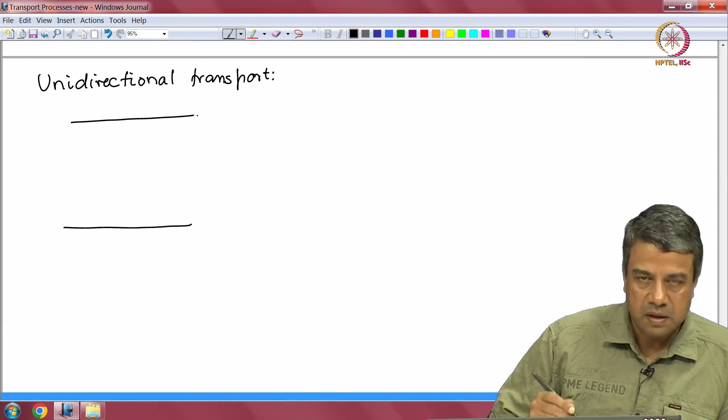Consider a domain. I will consider z as the direction across. Z is the direction in which there is variation. So, you could for example have the concentration field varying in some way between these two. Now, how do we derive an equation for the concentration? So, we will take a differential volume.

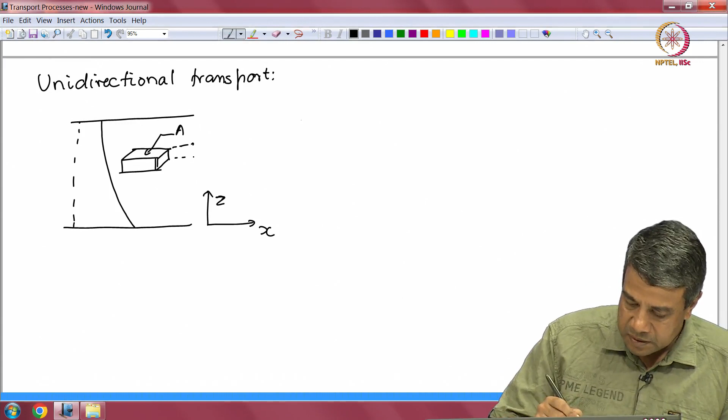Of area A perpendicular to the z direction and thickness delta z. Area A perpendicular to the z coordinate and thickness delta z, and we will write a balance condition for that. So, this is the location z, this is the location z plus delta z, and the difference between these two is delta z.

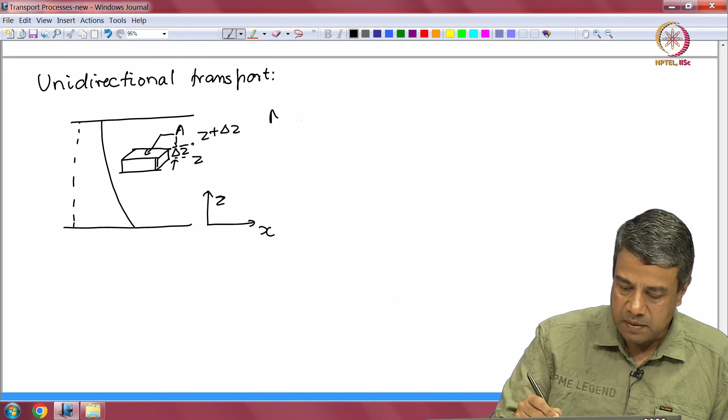The total mass in the differential volume is the concentration times the volume itself. Mass is equal to C of z, t times delta z times A. That is the total mass in the differential volume.

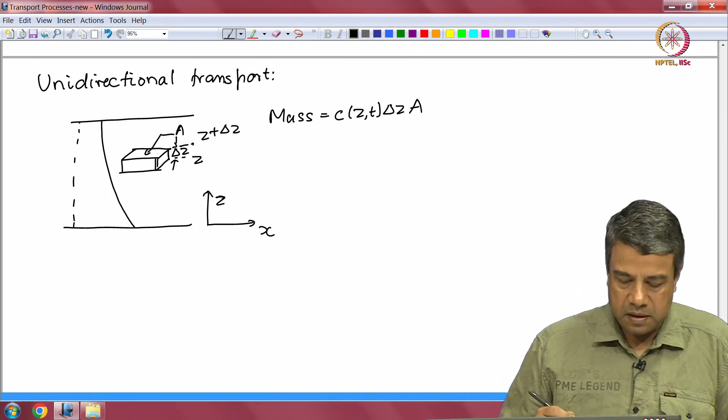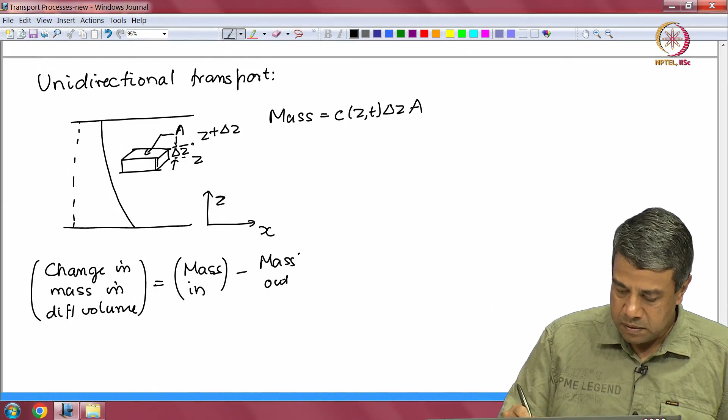What is the balance condition? The mass conservation condition is that change in mass in differential volume is equal to mass in minus mass out, plus production.

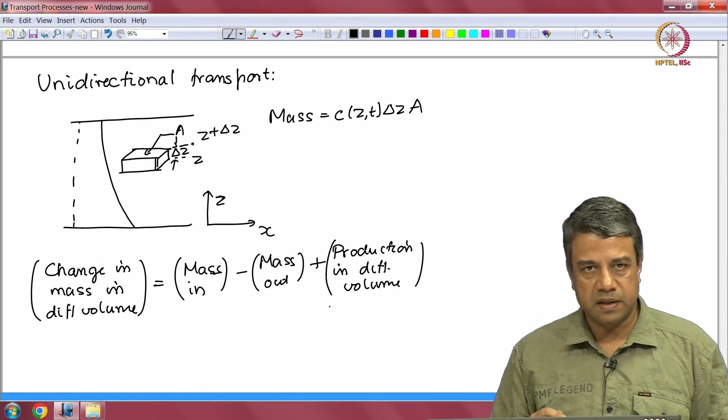Of mass in the differential volume, the source of mass. So, that is the conservation condition. What is the change in mass in a time delta t, for example?

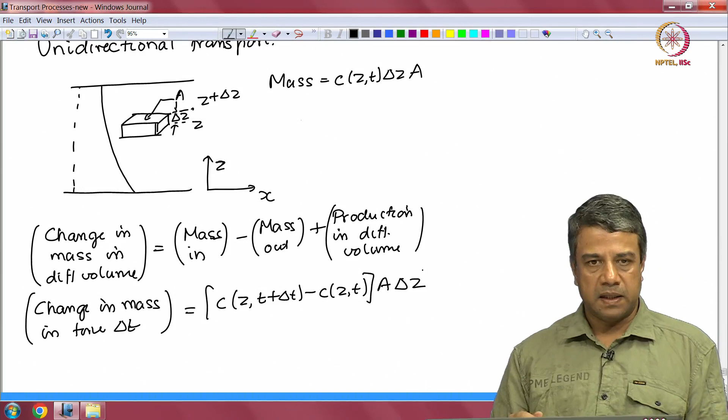In time delta t in this differential volume, the change in mass within this differential volume is going to be equal to the concentration at z, t plus delta t minus the concentration at z, t, the change in concentration, times the volume, which is A delta z. That is the change in mass in a time delta t.

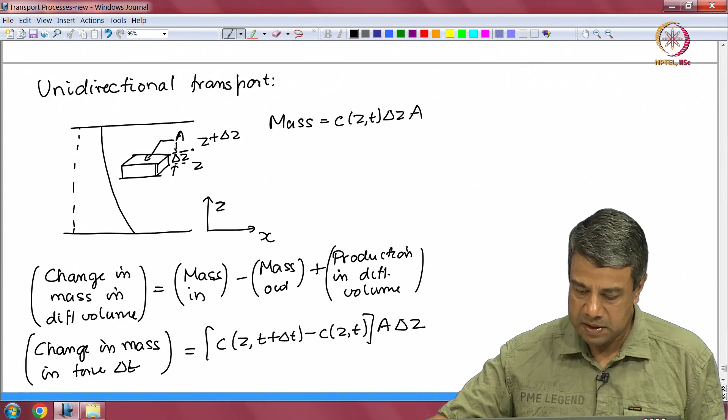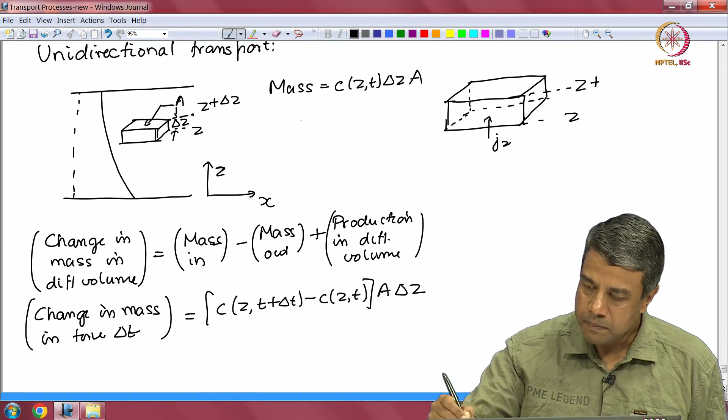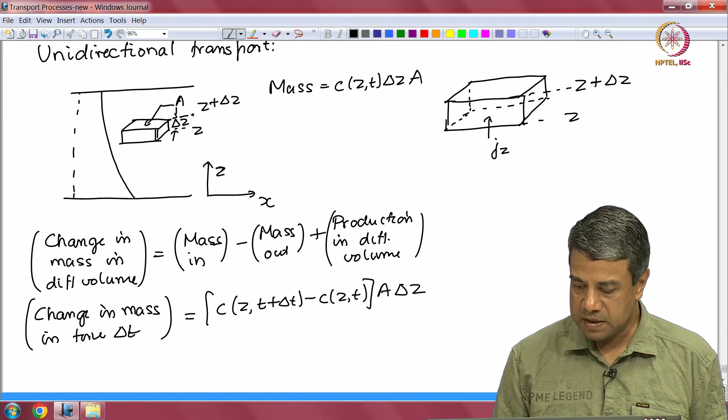What is the mass in? So, if I just expand out that differential volume over here, there is a mass coming in because of the flux at the surface at z. Recall that I had said the flux is positive if it is in the plus z direction. Therefore, the mass in is because of the mass coming in at z.

So, mass in is equal to the flux at the location z times the surface area A times delta t. Note that the flux is mass transported per unit area per unit time. So, I have to multiply the flux by the area and by time in order to get the mass coming in.

Similarly, mass out: mass decreases in the volume because of the flux that is leaving at the location z plus delta z. Therefore, this is equal to J z at z plus delta z, A delta t. So, those are the components of the mass in and mass out at the surface.

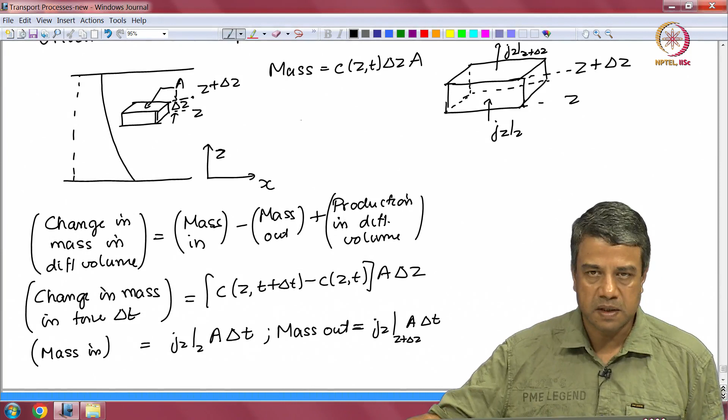I should note here that because there is a variation in the concentration only in the z direction, this is unidirectional transport. That means that the flux is also only in the z direction. So, that is the mass in and mass out, and finally, we have the production.

Recall that I told you that the production is defined per unit volume per unit time. So, this is going to be equal to the rate of production of mass at the location per unit volume per unit time multiplied by the volume multiplied by delta t. That is the rate of production within this differential volume, because I have defined S as the production per unit volume per unit time.

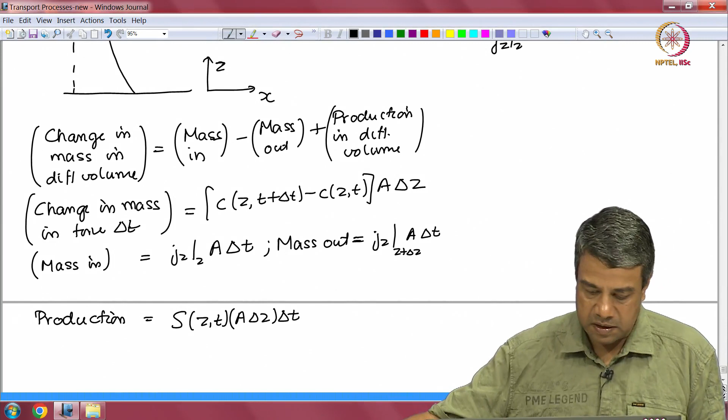So, these are the different terms in the equation. I put it all together. C at z, t plus delta t minus C at z, t, into A delta z, that is the change in mass in the differential volume, is equal to the mass in, which is J z at z A delta t, minus the mass out, which is J z at z plus delta z A delta t,

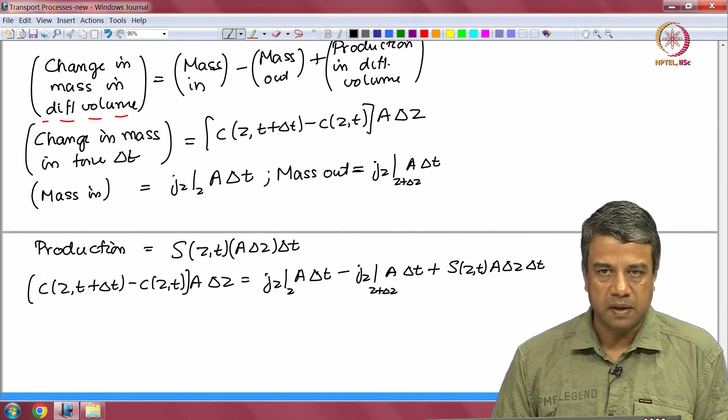plus S of z, t A delta z delta t. So, this is the balance equation for the differential volume A delta z over a time delta t. We divide throughout by volume and by time to get a difference equation.

If I divide by A delta z delta t, I will get C at z, t plus delta t, minus C at z, t, by delta t. This is equal to J z at z minus J z at z plus delta z, divided by delta z. A and delta t will cancel out, and then I will get a final plus S of z, t. So, this is the mass balance condition.

I have done a balance for the mass in a differential volume over a time delta t, the change in mass in the differential volume A delta z over the time delta t, divided by A delta z and divided by delta t. Now, I take the limit delta z goes to 0 and delta t goes to 0. I get partial C by partial t.

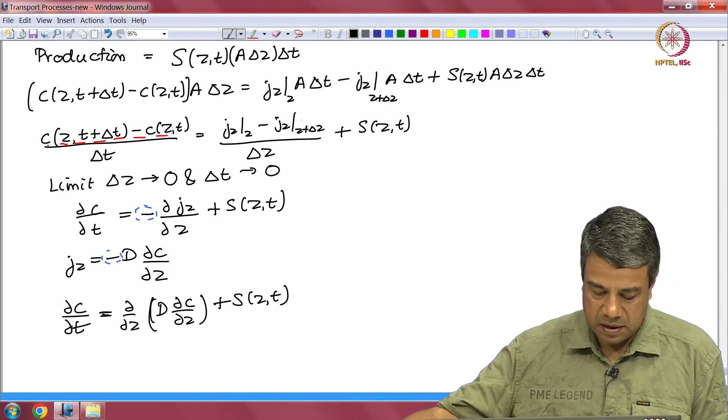If the diffusion coefficient is a constant, if the diffusion coefficient is independent of position, then in this equation I can take the diffusion coefficient outside and I will get partial c by partial t is equal to D times partial square c by partial z square plus S of z t.

So, this is the mass conservation equation for unsteady unidirectional transport, where there is a variation in concentration in only one direction and in time. Okay. So, this is for mass transport.

Energy transport, similar configuration. Let us say z is equal to 0 and z is equal to h. There is some variation in the temperature between these two. Let us say I have T naught and T h here, and there could be a variation of temperature with time as well.

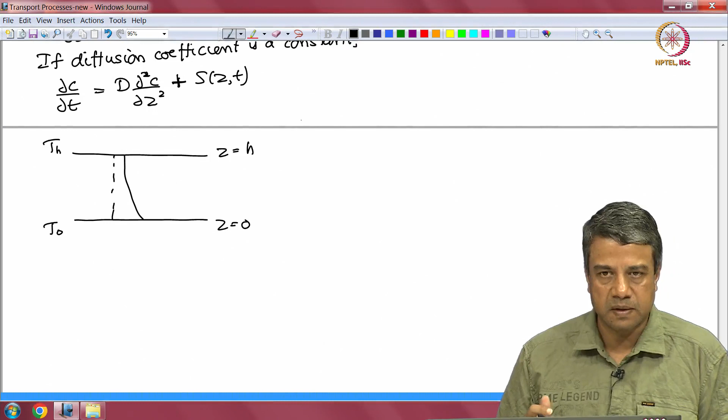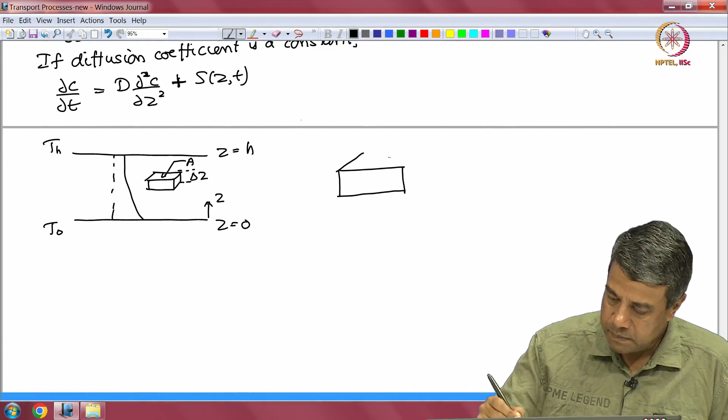Once again, I take a small differential volume of height delta z and cross sectional area A. Area perpendicular to the z coordinate is A. Let me expand out that volume here for easier visibility. This is at z, this is at z plus delta z, and the cross sectional area of this volume is A.

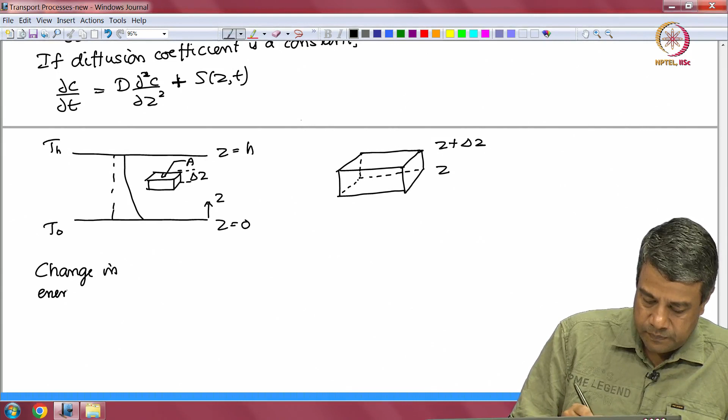The energy balance condition: change in energy in time delta t is equal to energy in minus energy out plus production of energy. So, that is the balance condition.

What is the change in energy in a time delta t? This will be rho Cp T at z, t plus delta t minus... this is the change in the energy density. Rho Cp T is the enthalpy density. I have to multiply this by the volume, A delta z, to get the change in the energy in the differential volume.

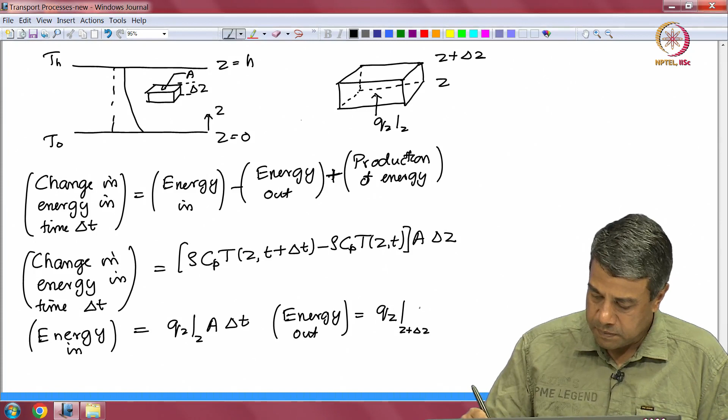Similarly, energy out is equal to qz at z plus delta z, A delta t. So, that is the energy coming in and the energy going out. And finally, the production of energy.

Production of energy is equal to a volumetric energy source, energy produced per unit volume per unit time, times A delta z delta t, where SE is an energy produced per unit volume per unit time. For example, by a reaction process, if it is exothermic, then SE will be positive, if it is endothermic, it will be negative, or you could have phase change processes as well, which are producing or consuming energy.

So, the general form of the production term will be a source times the volume A delta z times the time interval delta t. So, that is going to be the form of the energy production or consumption.

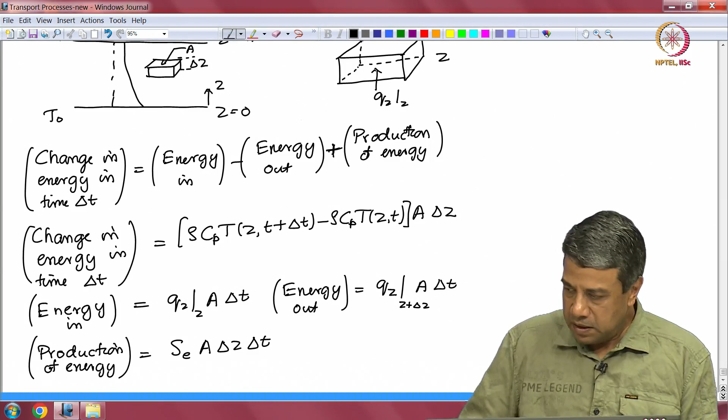So, putting all of these together, the left side is rho Cp T. Note that in general rho and Cp could be functions of position and time. So, all of these three will in general be functions of position and time. So, I will just use the enthalpy density for that. Enthalpy density H is equal to rho Cp T.

Therefore, the equation will be of the form H at Z, t plus delta t minus H at Z, t into A delta Z. That is the change in enthalpy in a time delta t. The change in enthalpy in a time interval delta t is the final at time t plus delta t minus the initial at time t times the volume, because H is an enthalpy density.

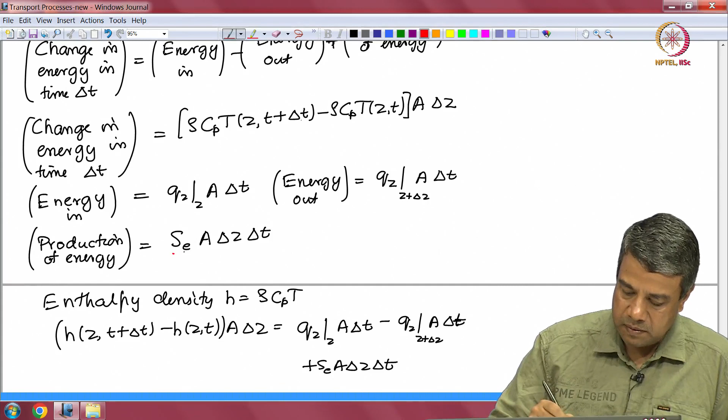Energy in, which is Qz at Z A delta t, minus the energy out, which is Qz at Z plus delta Z A delta t, plus the source, which is Se A delta Z delta t. Source per unit volume per unit time multiplied by volume multiplied by time.

Divide throughout by volume, divide throughout by time. And I will get H at Z, t plus delta t minus H at Z, t by delta t is equal to Qz at Z minus Qz at Z plus delta Z by delta Z plus Se. Divide by volume, divide by time, A delta Z delta t.

Take the limit as delta t and delta Z go to 0: partial H by partial t is equal to minus partial Qz by partial Z, because partial Qz by partial Z will be Qz at Z plus delta Z minus Qz at Z, divided by delta Z. This is the negative of that, plus Se. Or partial of rho Cp T by partial t is equal to minus partial Qz by partial Z plus Se.

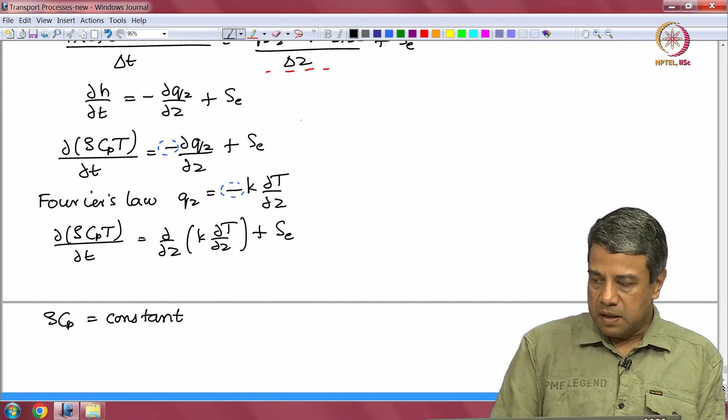Therefore, in many cases, this can be assumed to be a constant, in which case you can take it out of the derivative sign and write partial T by partial t is equal to 1 by rho Cp partial by partial Z of K partial T by partial Z plus Se by rho Cp.

And since this is a constant, you can further simplify this as partial T by partial t is equal to partial by partial Z of K by rho Cp partial T by partial Z, and K by rho Cp is equal to the thermal diffusivity. So, the equation becomes partial T by partial t equals partial by partial Z of alpha partial T by partial Z plus Se by rho Cp.

Further, if the thermal diffusivity is also a constant, then I can take it out of the derivative, and I will get partial T by partial t is equal to alpha partial square T by partial Z square plus Se by rho Cp.